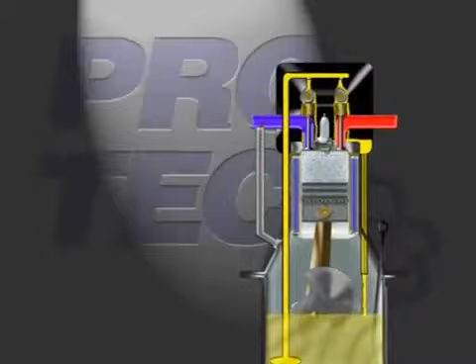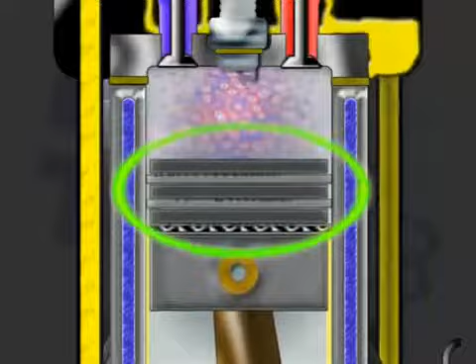In particular, compression is reduced as a result of sediment in the area of the piston rings, oil rings, and their grooves.

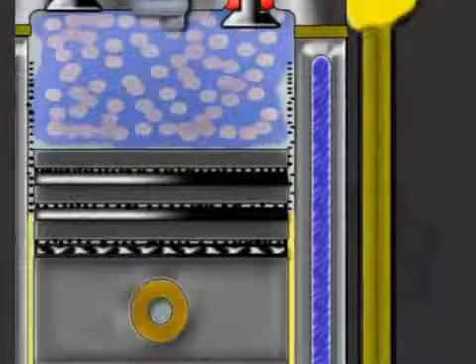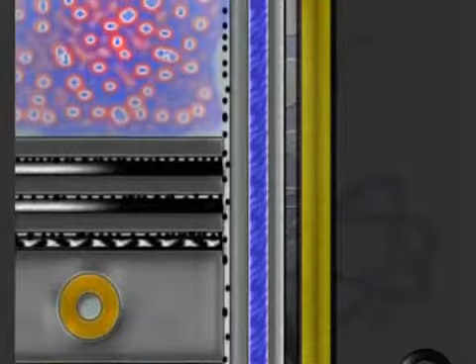The deterioration in the combustion of the fuel-air mixture resulting from this leads to a reduction in the engine's performance. As a result of this, there is an increase in both oil and fuel consumption. This creates a situation where the sediment caused by the combustion process increases markedly, exhaust fume levels rise, and not least, the wear and tear on engine parts escalates.

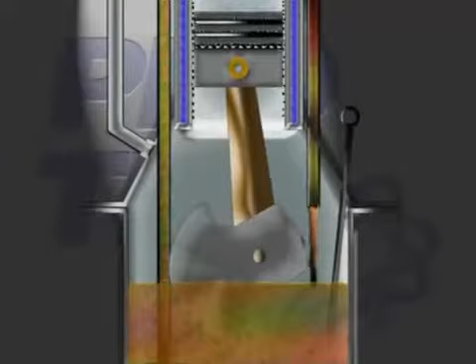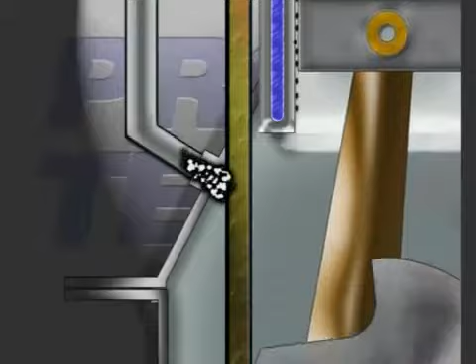Parts of the mixture and combustion gases evaporate in the crankcase and thereby accelerate the speed at which the quality of the oil deteriorates. And this can lead to problems in the crankcase breather system.

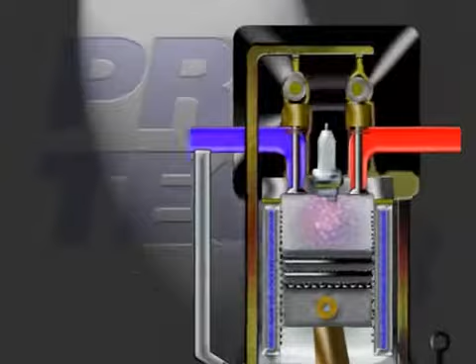Larger particles of dirt, such as the formation of resin deposits in the oil ducts, can trigger a reduction in the lubrication of important components, for example, the camshaft.

Are all these impurities removed by a normal oil change? To illustrate this, let us have another look inside the crankcase.

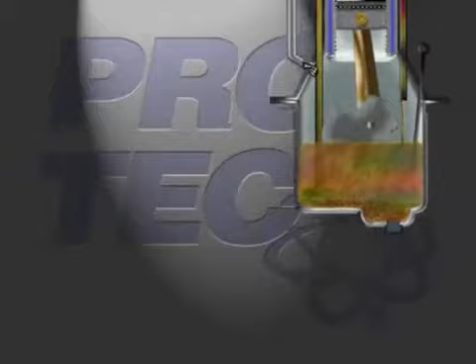The old oil is drained during the simple oil change process. However, not all the impurities caused by running the engine are removed when the old oil is drained off. Some of them remain in the form of deposits in the oil and the lubrication system.

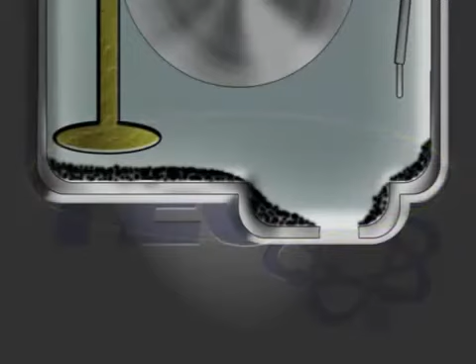Once the engine has been refilled with fresh, clean oil and is then started, the new oil absorbs the remaining deposits, and in a very short time, the oil is once again contaminated. This situation naturally has a negative effect on the efficiency of the new oil.

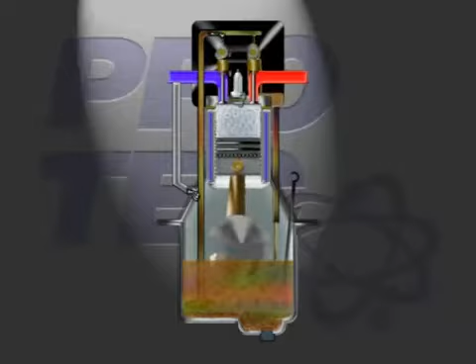In order to maintain both the performance and the economic efficiency of combustion engines, we recommend that the complete oil and lubrication system is cleaned before each oil change.

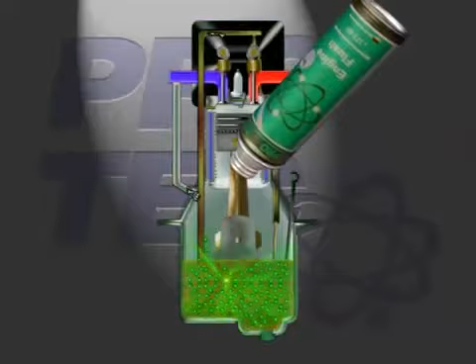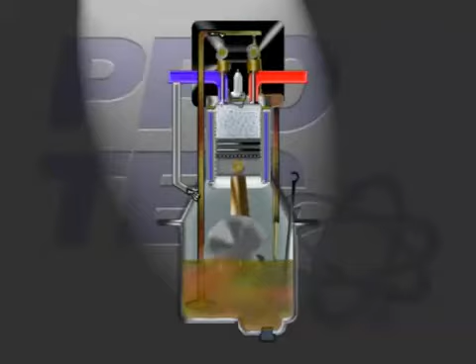After our cleaning agent has been added to the old oil, the engine is run in idling mode for 10 to 15 minutes. During this time, it releases all the impurities caused by running operations in very fine molecules, as shown here at individual problem zones.

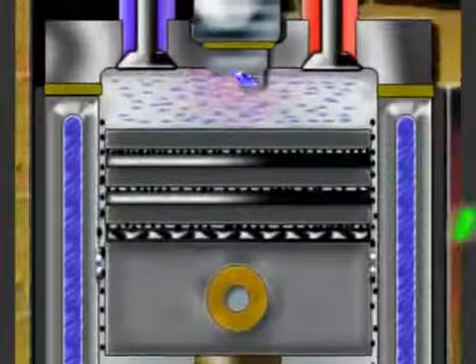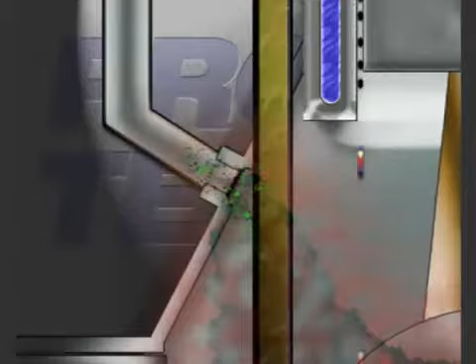In our example, this is the piston ring area, the crankcase breather area, the camshaft lubrication area. At the same time, highly efficient lubricating substances protect the engine during the whole cleaning process.

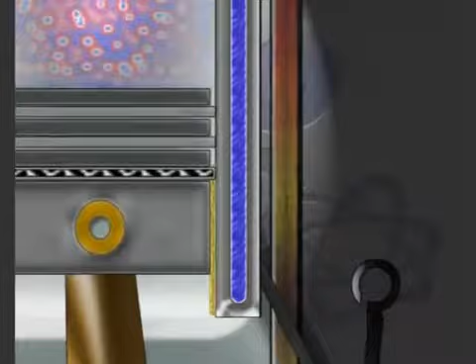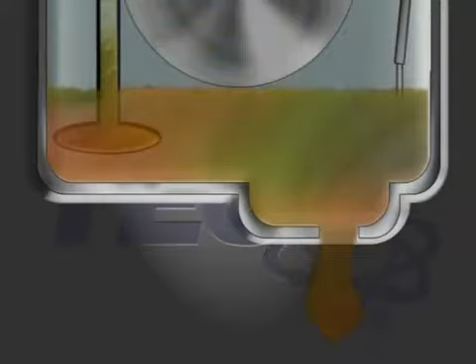Elastomers, such as oil seal rings and O-rings, are kept absolutely supple. All the impurities are now removed when the old oil is drained. This means that the oil and the lubrication system, which we fill with new fresh oil, are kept very clean.

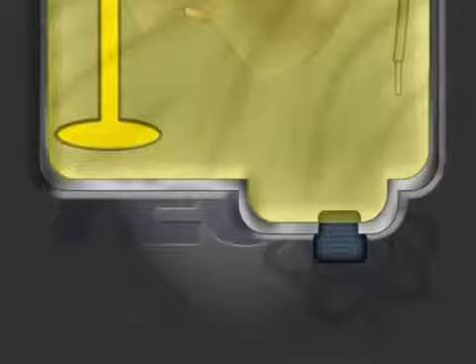Now, the new oil can perform to the best of its ability in a clean environment and fulfill the tasks required of it, such as lubricating, sealing, cooling, purifying, and keeping particles in suspension.

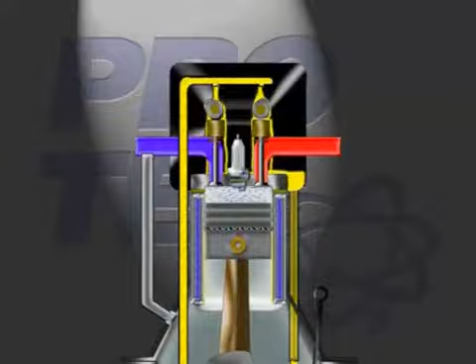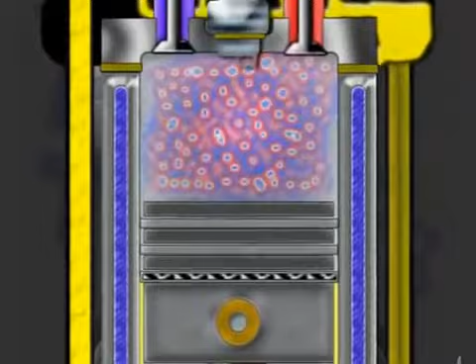The fresh oil is now able to absorb the impurities that have been newly created and is no longer limited in its ability to perform by the old deposits.

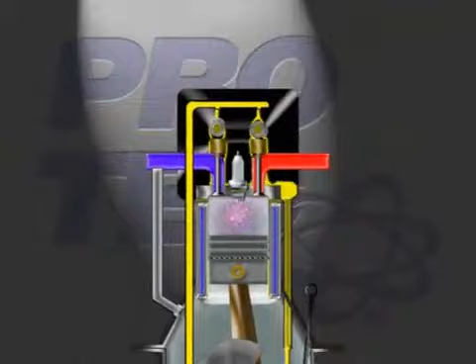As a result, we have new, fresh oil in a clean engine, the best possible oil and fuel consumption, improved engine performance, less wear and tear on parts, the lowest exhaust emissions, and a longer life for the catalytic converter.